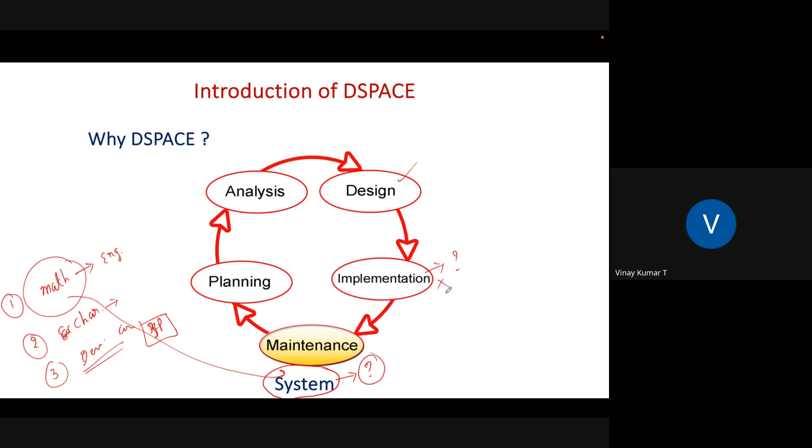The advantage of the DSPACE controller is, once you know the new concept to change the characteristics of the actual system, you no longer need to worry about implementation. Once you adopt the DSPACE controller, implementation is not a big challenge. Within a short period, we can implement the logic and extract the physical characteristics after adopting this controller.

This is the advantage. The DSPACE controller is basically called a rapid control prototyping system. What is the advantage of this rapid prototyping system? Whatever logic you have developed to solve the issues the system is facing, based on the problems faced by the actual system, that logic we can implement quickly, test, and evaluate physically. That is the advantage of rapid control prototyping.

Now, how to access this controller? At the end of today's session you will get clarity. But before that, I need to explain the significance of the controller.

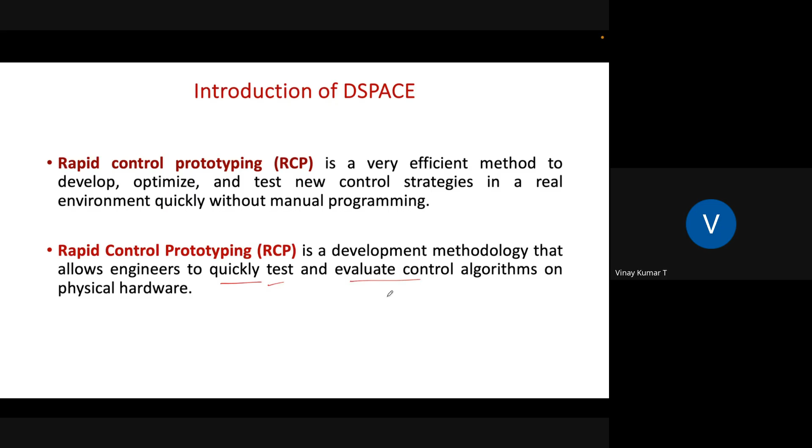The objective of the DSPACE controller is it will execute the control logic. Finally it will give the control pulse to the power semiconductor devices, so that the power semiconductor device controls the energy transfer from the input side to the output side. Whatever output comes from the power converter, it is under control, in order to change the characteristics of the actual system.

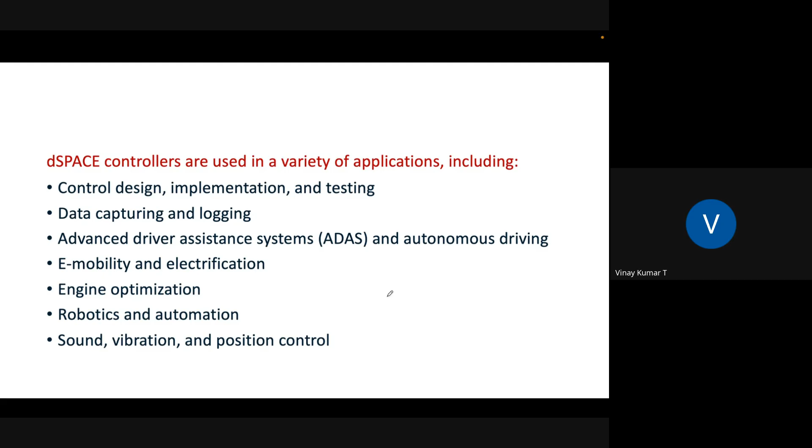These are the various applications of the DSPACE controller: autonomous driving systems, e-mobility, electrification, smart grid applications, grid-connected inverters, robotic applications, position control, vibration, sound, and various other applications. At the end of today's session, I will explain the limitations of this controller and discuss it in detail. For understanding purposes, let's take the EV propulsion system as an example.

In an EV propulsion system, suppose this is the actual EV propulsion system, how can we test your control logic in a laboratory session. These are all the various control methods under the software side, the methods adopted to control the speed of the motor through a power semiconductor device. This mathematical logic, if you want to implement through hardware, in general microprocessor, microcontroller, DSP, FPGA boards are adopted.

The expected output of the electronic controller is finally it will give a control pulse. This pulse will apply to the power converter. The power converter will produce variable voltage and variable frequency to the system. Finally, system characteristics will change based on the customer required speed or customer required position. This is what we are doing in general.

Whenever you want to control the speed of the machine, first you have to change the reference through the software. By changing the reference, your control logic will decide how much duty cycle is required to the power semiconductor device, so that the power semiconductor device, according to requirement, will change the RMS and frequency applied to the system, so that system characteristics will change.

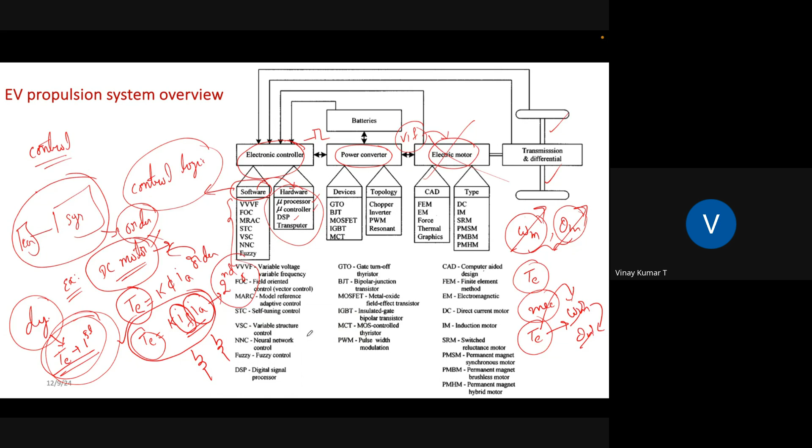By adopting the controller, how the order changes from higher order to lower order, we'll see by taking a simple method that we adopt in undergraduate course. In undergraduate course, there is a popular method, right? What is that method? See, this is a torque profile. Natural response of the DC motor is non-linear, right?

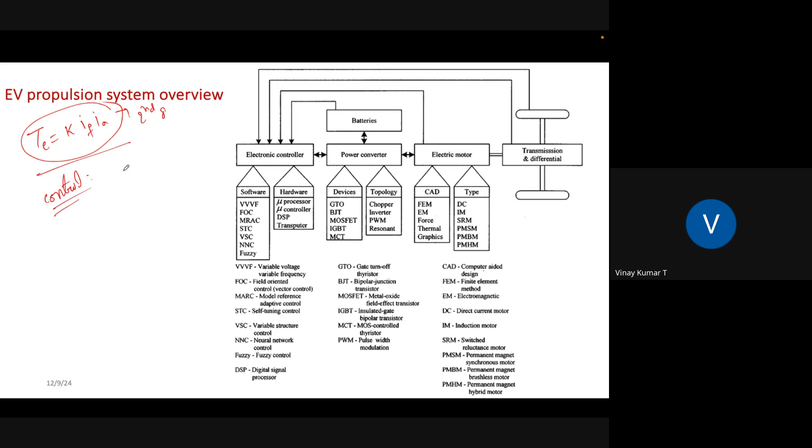So next, what we are doing in the laboratory while controlling the motor below base speed, right? To control the speed below base speed, we are adopting the armature control method. Now, what are we doing in the armature control method? This method is very popular to control the speed of the DC motor. In armature control method, throughout the operation, we are maintaining field current as a constant.

Please understand, this is a technique. This is a control technique. Whether it is open loop or closed loop, you forget it. This is the concept proposed by the engineers to control the torque instantaneously. To bring the system from higher order to lower order, they have proposed this method for DC motor. In armature control method, the necessary condition is that throughout the operation, you need to forcefully maintain field current as a constant.

If field current is constant, then what will happen? Your torque becomes directly proportional to Ia. So this is it. This is the beauty of the control method, the control logic. Once you adopt armature control method to the DC machine, what will happen? Your second order system becomes first order. First order is nothing but linear. If it is linear, we can control instantaneously.

Instantaneous control is so important for industrial applications; wherever high performance is required, instantaneous control is required. If you want to control the speed or position instantaneously, your control variable should be in linear mode, right? It will not simply convert from nonlinear to linear. You need to adopt some engineering technique so that we can change the order of the system from second order to first order. A first order system is required to improve the dynamic response.

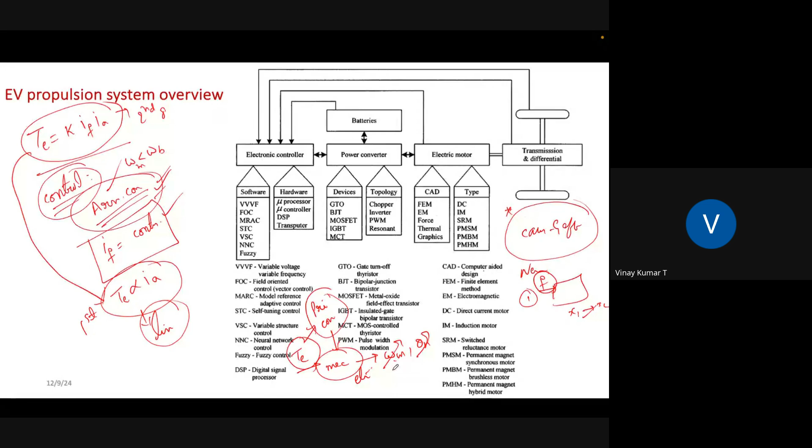So the main objective of today's session is understanding how to implement the control logic in dSPACE. At the end of today's session you will get clarity. Before that, you should know the significance of the controller, its main objective, why it is required. Without a controller, we cannot improve the dynamic response instantaneously. If you want to, you need to adopt a controller. By adopting the controller, we can reduce the order and improve the dynamic response. Next.

One more important concept is, what are the challenges in AC systems? In grid connected systems, particularly in smart grids, you need to adopt three-phase inverters. What are the challenges with respect to the three-phase AC system? Anyone? What are the issues with a three-phase system?

Anyone from the participants? What is the issue with the three-phase AC system? "So the unbalance is existing within the three-phase system." Okay, unbalanced. Let us assume that everything in the system is fine, that there is no unbalance. Then? "Synchronization." Okay, everything is fine.

You see, I'm not talking about whether the AC system is balanced or unbalanced. Now everything is fine. On the input side there is a balanced supply. All signals, A phase, B phase, C phase, are in symmetry. Time delay is there, right? Magnitudes are also fine, peak values are also matching. Now, for understanding purposes, can I explain here by taking one example, right?

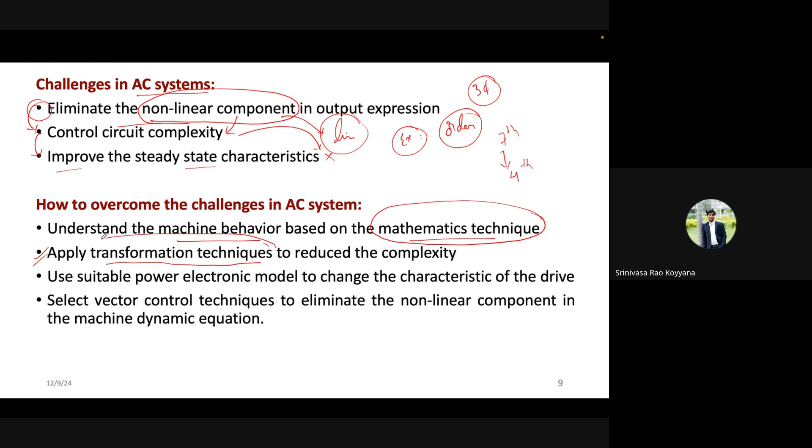What is... We analyze the system behavior, sir. We analyze the system behavior. Okay, we'll analyze the system behavior. Okay, anyone? To determine gain constants. Anyone else? Anyone?

It is a technique. It is an engineering technique. It is a mathematical technique, right? By adopting this technique, this one will help to reduce the complexity. For example, if your system is in 7th order, it will bring it from 7th order to 4th order. Anyway, this is the expected outcome of the transformation technique.

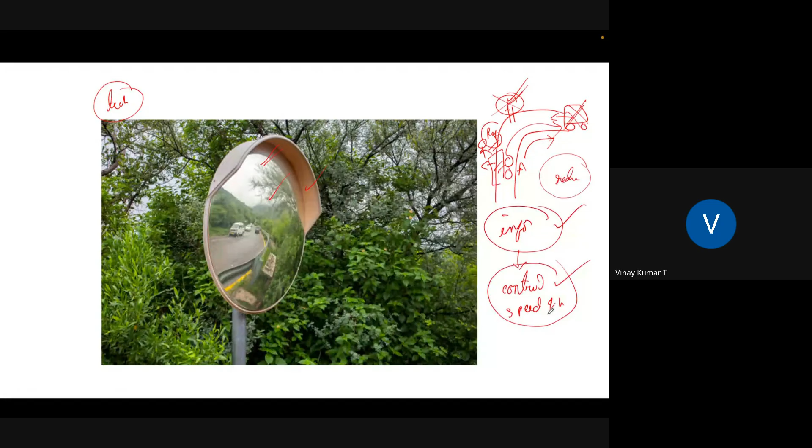So what is the primary objective of this mirror? The mirror will give information. Based on the information, from a reference point of view, from a control point of view, we can easily control. You got my point? What is the need of transformation? Basically, transformation techniques will give information about the actual systems in terms of two-phase variables. That is the primary objective of the transformation.

See, our natural systems are always three-phase, right? Whenever you want to extract the behavior of the three-phase system, we can also extract it by taking three-phase variables. But the problem is, three-phase systems are more complicated than two-phase systems, right? That's why by using two-phase transformations, we can minimize the execution time, and whatever information is available in three-phase, the same information we can extract through two-phase variables. Once you get the information in two-phase variables, it is not a big deal to control the actual system.

Got it, participants? You got my point? What is the need of transformation? Getting information is the primary objective of the transformation. It is a technique. Once you get the information about the actual system in terms of two-phase variables, it is not a big deal to control our system.

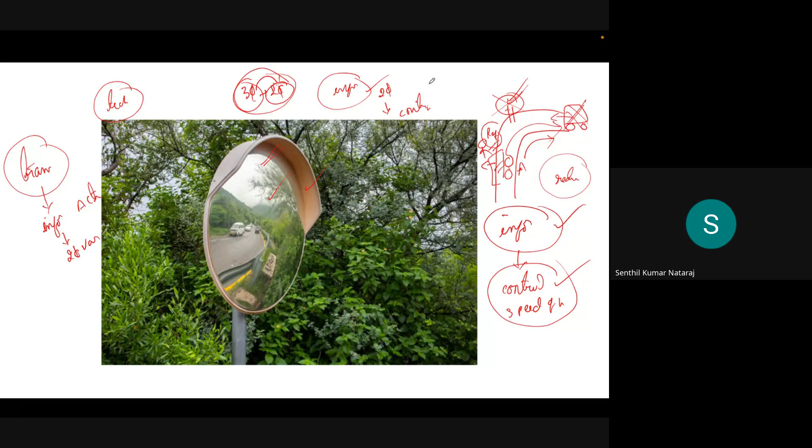Yes, sir. See, many of the scholars think that this transformation will minimize the order, or transformations will reduce the order. Please understand: by using transformation, we cannot bring the system from higher order to linear mode. We can minimize the order, but we cannot bring it into linear mode. If you want to bring it to linear mode, you have to apply advanced control methods.

By adopting the advanced control method, we can bring it, but combinations are required. By adopting this transformation technique and control technique with a power electronic module, by combining these three techniques, we are able to bring the seventh-order system to fourth order by adopting transformation. After that, advanced control methods are required. By adopting these control methods, we can change the order from fourth to first order.

So transformation techniques are required. Next, advanced control methods are required, plus a power electronic module. By taking the combination of transformation technique, control method, and power electronic module, we can eliminate the nonlinear effect in the complicated AC system.

By using the combination of transformations, power electronic module, and advanced control methods, the advantage is we can improve the dynamic response of the AC system similar to a DC machine. That is the strength of this transformation technique and power electronic module. Without the power electronic module, we cannot change the characteristics. Please try to understand. Right?

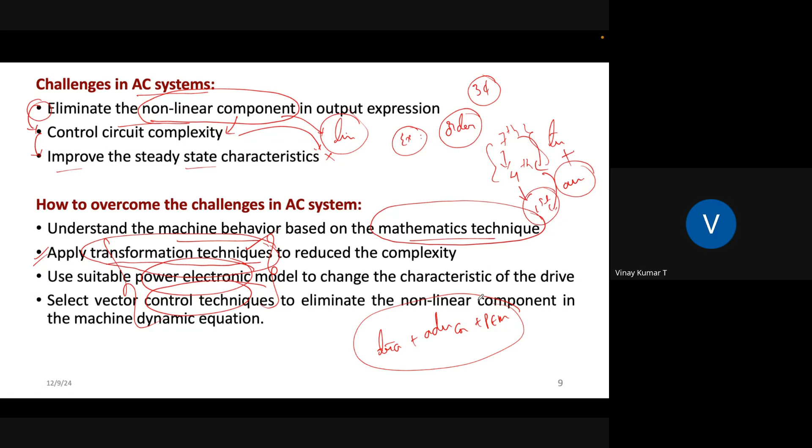See, the main objective of today's session is to control the power converters through dSPACE software. Whenever you want to control the power converter, first you should know why a controller is required, why control logics are required, why transformations are required. Transformations will give information. The primary objective of transformations is to give information about the actual system in two-phase variables. Take this example.

These three techniques are very popular for electrical scholars, particularly in power system and power electronic applications, to control the system. So what is the primary function of the Clarke transformation? Your natural system is always in three phase. By adopting the Clarke transformation, three-phase variables will convert to two phase. Next, by adopting the Park transformation, two-phase AC variables will convert to two-phase DC.

Many of the scholars think that by adopting Clarke transformation or Park transformation, or directly three-phase AC to two-phase DC, the characteristics will change. Please try to understand, characteristics will not change by adopting the transformation. Only by adopting the transformation technique plus advanced control methods will the characteristics of the actual system change.

These transformations basically only give information in terms of two-phase variables. Once you know that information, after adopting the engineering and design techniques, we can improve the dynamic response. Many scholars think the dynamic response will improve by adopting the transformation technique, but it will not improve simply by adopting it. By adopting the transformation technique, we get information with fewer variables.

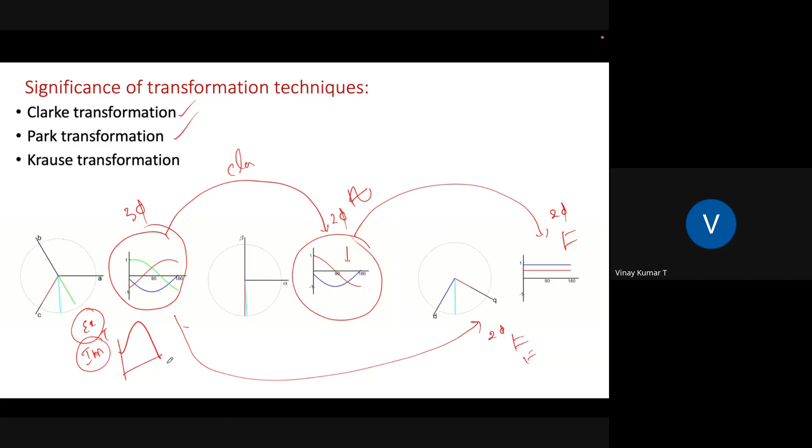For understanding purposes, take the best example, the induction motor. Why? Because it is a very popular machine; 80 to 90% of industries adopt it to meet mechanical requirements. What is the expected output of the three-phase induction motor? Torque. This is the nature of the torque generated by the three-phase induction motor. By taking three-phase variables, we can extract the behavior of the induction motor.

Instead of three-phase variables, by taking two-phase variables also we can extract the same information. Whatever torque is generated by the three-phase system with three-phase variables, the same profile we can extract with two-phase variables. Instead of AC signals, by adopting the Park transformation, the same characteristics, the same torque profile, we can extract with DC variables also.

Here the common point is, whether you take three-phase variables, two-phase AC variables, or two-phase DC variables, the characteristics of the system won't change. The system behavior is the same. Only the number of variables involved in extracting the behavior is different, right? You got my point. One more important thing: what is the common point among the three cases? Anyone?

Forget about the common point. I want to ask one important question. What is the base for this transformation technique? Anyone? What is the base for converting three-phase to two-phase AC variables, and two-phase AC to two-phase DC? What is the base for this transformation technique? Anyone from the participants?

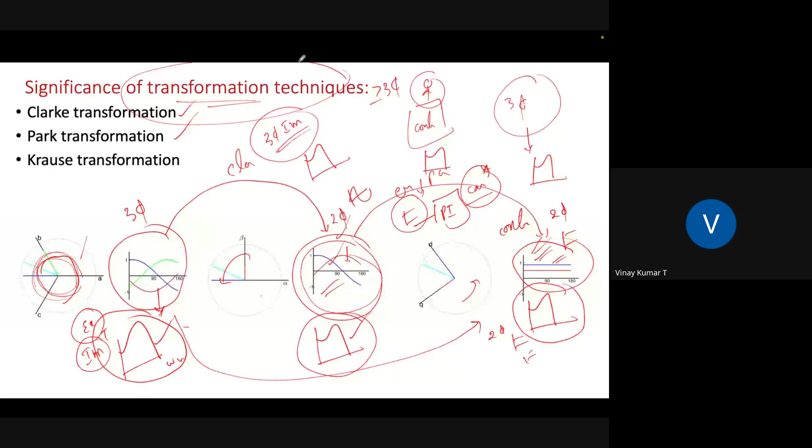Your system is an AC system. The challenge is more number of variables are involved in the output variable. If more variables are involved, you have to adopt a transformation technique, and by using transformation technique, advanced control methods, and different power electronic module combinations of these three, we can improve the dynamic behavior of the system based on the customer requirement. These are all the topics we covered till now.

Next, another important question is, the base for transformation signal is MMF. This is a very beautiful concept. Whenever you want to convert the signals from 3-phase to 2-phase or 2-phase to DC, they take MMF as the base. Whatever MMF is produced by this 3-phase system, you have to take care of the same MMF. MMF should not vary. The resultant net MMF produced by the 3-phase system and the net MMF produced by the 2-phase system must be same. If you satisfy this condition, it is not a big problem to meet the power invariant or magnitude invariant condition while transferring signals from 3-phase to 2-phase.

Power invariant condition is so important for grid connected inverter applications. Whenever you want to control, particularly in smart grid applications, real power or reactive power, this power invariant transformation technique is so important. Even in drives applications, the magnitude invariant condition is so important.

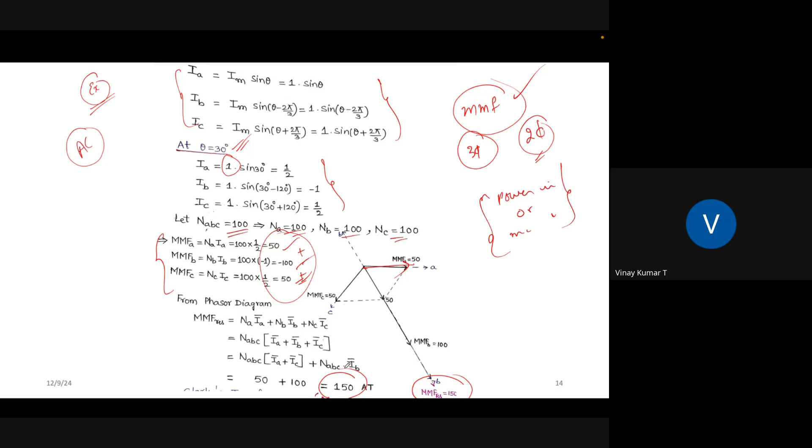Now let us apply Clarke transformation. The significance of Clarke transformation while converting variables, 3-phase to 2-phase, right? By taking this coefficient, we can maintain magnitude invariant. Magnitude invariant condition is so important for drives application.

Whenever you want to control the torque generated by AC machines, generally they are adopting this magnitude invariant condition. In magnitude invariant condition, this factor is so important. Even if you take magnitude invariant condition and substitute here, take same instant, finally net MMF produced by the 2-phase system is also 150 ampere turn. Even if you take magnitude variant,

nothing but power invariant condition. Even if you adopt power invariant condition, net MMF won't change. This power invariant condition is so important in case of grid connected inverters. Whenever you want to control real or reactive power effectively, they are using this coefficient. Coefficient of the transformation matrix is square root of 2/3.

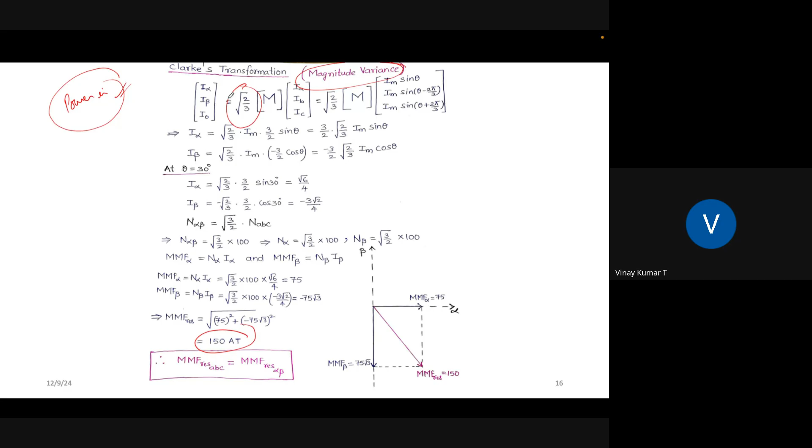This coefficient generally they will calculate based on the MMF. MMF is so important while converting signals from 3-phase to 2-phase. MMF should not vary. Whatever MMF produced by the 3-phase system, if you maintain the same MMF, it is not a big deal to convert the information from 3-phase to 2-phase with fewer variables.

Anyone from the participants? Participants? Yes sir. You know about feed forward controller? Anyone from the participants? What is the significance of feed forward controller? Where is it required? At least you heard the name of this feed forward controller? Participants? What is the object of this feed forward controller?

See, whether it is a feed forward controller or feedback controller, any controller, the main object is to improve the system response. It will reduce the order of the system and eliminate the effect of the dominant pole. Whether practically, first you need to understand the characteristics of the actual system. Based on the characteristic equation of the actual system, you need to identify if there is any dominant pole. If a pole is close to origin, the system response will become very poor. By using this feed forward controller, this is one engineering technique to eliminate the effect of the dominant pole.

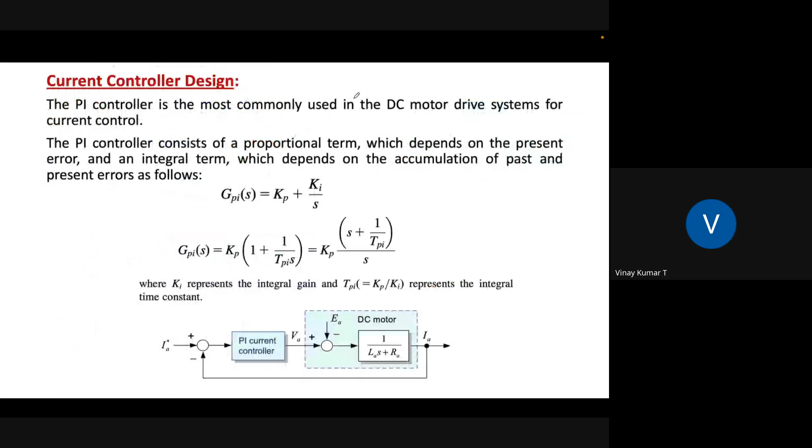It is entering the system because of back EMF. Back EMF is directly proportional to omega m. Omega m is the output of the mechanical circuit. Mechanical system transfer function model is 1 by Js plus B.

So finally, because of back EMF, what will happen? Mechanical time constant is involved in the electrical circuit. Basically, your armature circuit is electrical circuit. But once back EMF enters the picture, while controlling the current, there is a mechanical time constant entering in the picture.

So the nature of the mechanical time constant tau m, there are two poles, one by tau m, one by tau a. Tau a practically is very less. If tau a is very less, pole position P1 is very far from the origin. So tau m is very, very high. If tau m is very high, P2, the pole offered by the armature circuit due to back EMF, has a very high time constant, so that pole position is closely to 0. P2 is closely to 0.

So what is the problem? Once back EMF enters the picture, bandwidth of the circuit is decreasing. Bandwidth is nothing but distance between the origin to dominant pole. If bandwidth is less, ability to track its reference is very poor.

So as an electrical scholar, as a designer in any system, first you need to extract the characteristic equation of the system. In the characteristic equation, you need to identify if any signal is creating disturbance or not. If the disturbance signal is really creating harm in the response, we don't have any option, you need to adopt a technique.

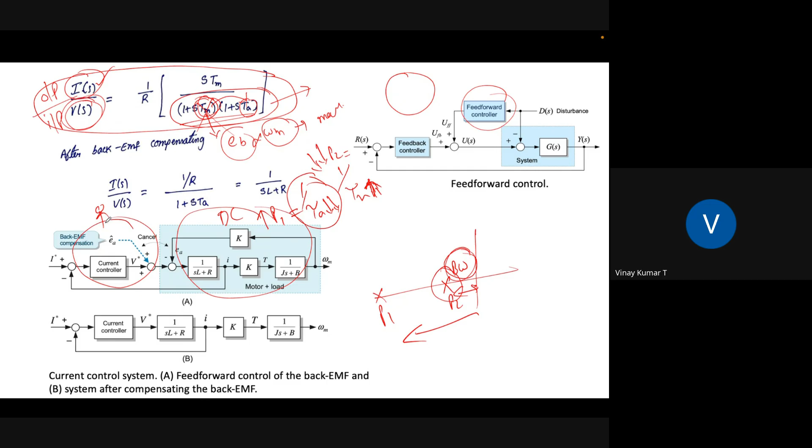By adopting the feed forward controller, here's what they will do. This is our controller, this is our system, this is our DC machine. With respect to controller, this signal is acting as a disturbance. To eliminate the effect of disturbance, from a control point of view, you should know what is the polarity of the disturbance.

If polarity of the disturbance is negative, you need to inject the positive back EMF with respect to controller. If you add positive back EMF signal with respect to controller, then with respect to this reference point, back EMF minus and back EMF plus will cancel each other. Here, the effect of the dominant pole will be eliminated with respect to this reference point.

This is the transfer function model after adopting this feed forward controller. This is the significance of feed forward controller. By using feed forward controller, we can eliminate the effect of the dominant pole. By adopting a feed forward controller, we can improve the bandwidth.

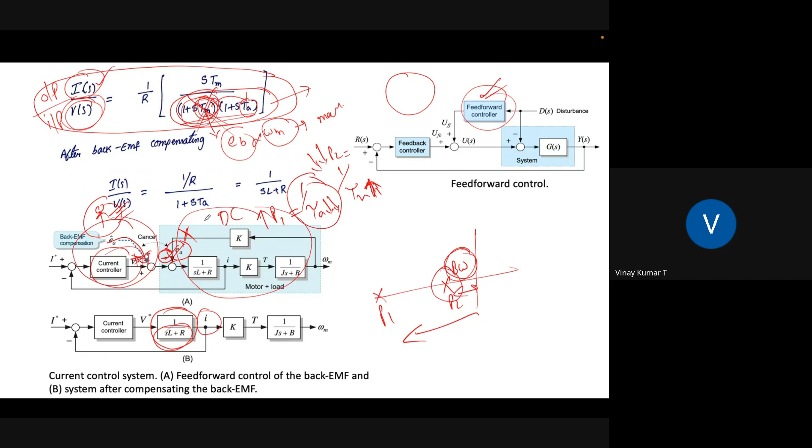Once the bandwidth of the system is improved, automatically the dynamics of the IA will increase. IA dynamic response only depends on the electrical pole. Earlier it was mainly dependent on the mechanical pole. Mechanical pole position is very close to origin, in that case it's very difficult.

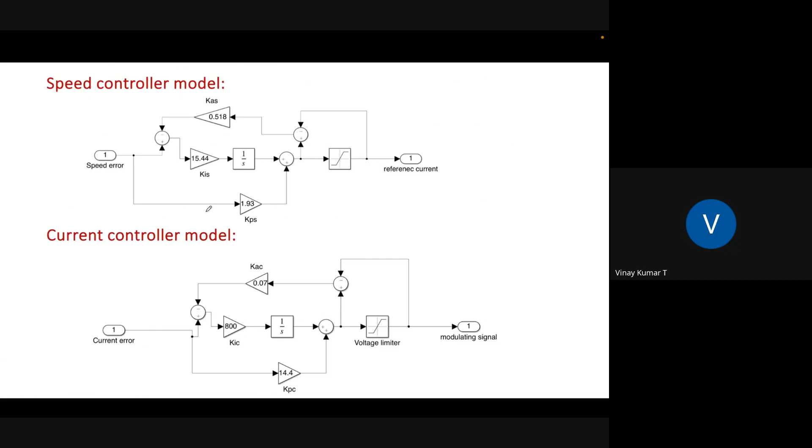If you want to improve the dynamic response, you have to bring the pole far from the origin. If you want to bring the pole position far from the origin, you need to identify whether any dominant poles are there in the system or not. How can we identify the dominant pole? Based on the characteristic equation.

My suggestion is, whenever you want to control the system, whether it is a simulation or hardware, the important thing is you need to analyze the system characteristics in detail. After analyzing the system characteristics, you have to identify whether any disturbances are there in the system or not. If there are any disturbances, you need to identify whether the disturbance is really creating harm or not.

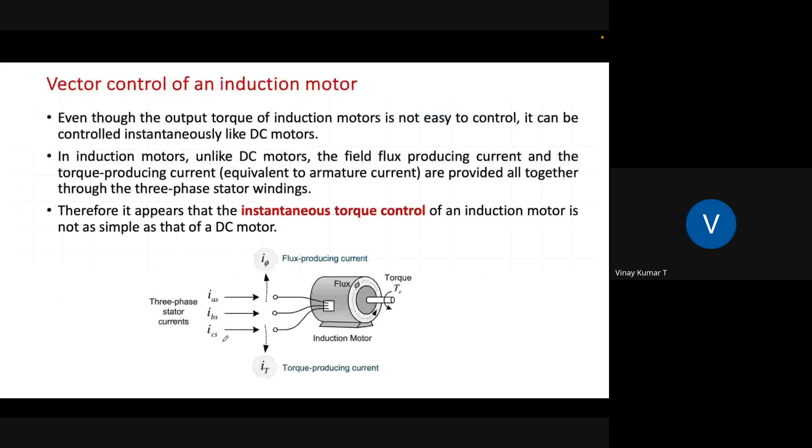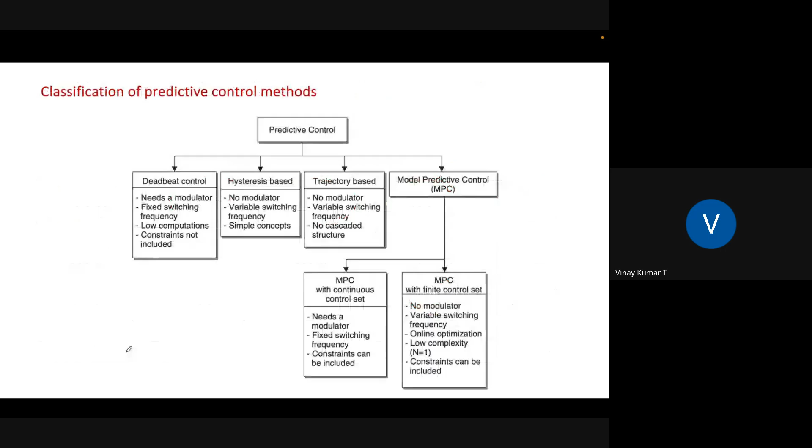Now, by using this slide, without spending more time, I can tell what is the advantage of the model predictive controller compared to conventional PI controllers. Most engineers, for their research work, are adopting the PI controller. If you adopt a model predictive controller, your steady state response will improve.

But whenever you want to implement a model predictive controller, it requires two things. Your controller must be a digital controller. Plus you should know the actual system model. Without knowing the actual system model and without adopting a discrete controller, we cannot implement model predictive control. This model predictive controller is applicable only for digital. Using analog controllers, we cannot implement it. By using DSP or FPGA boards, we can implement this controller effectively.

So what is the basic difference between the PI controller and the model predictive controller? By using this slide, we can understand. Anyone from the participants, if you know the difference between these two, you can tell. Participants, you know about model predictive control? It can estimate the future value. Okay, anyone? Anyone from the participants?

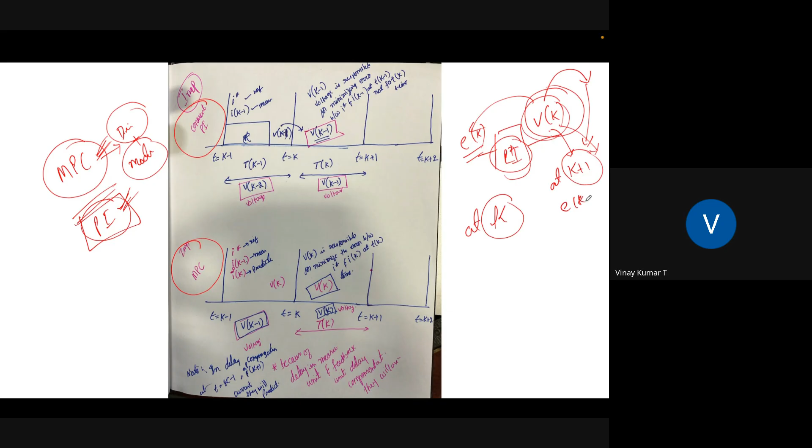But if you take model predictive controller, based on the error, it will predict the error k plus 1 at kth instant itself. It will identify the behavior of the error at k plus 1 instant and the required voltage for k plus 1 instant. It will calculate at kth instant itself. Finally, whatever voltage vector is decided at kth instant, that voltage v of k plus 1 will apply at k plus 1 instant only. So this voltage vector will take responsibility to eliminate the error effectively at k plus 1 instant. This is the basic difference between model predictive controller and PI controller.

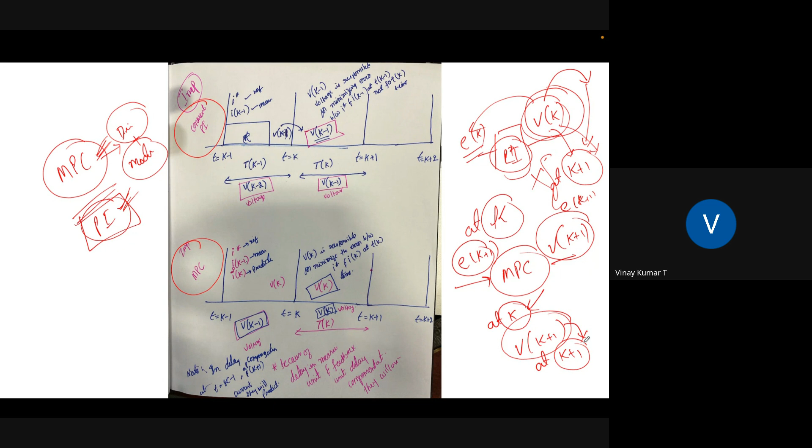In the PI controller, there is a sample difference in voltage vector. Whatever voltage vector you are applying at a particular sample, that voltage vector is not responsible for eliminating the current error. It is responsible for eliminating the error in the previous sample. That's why, if you verify the response, see, this is the PI controller or hysteresis controller. This is the response after adopting the model predictive controller. If you verify this response, steady state response is improved with the model predictive control technique.

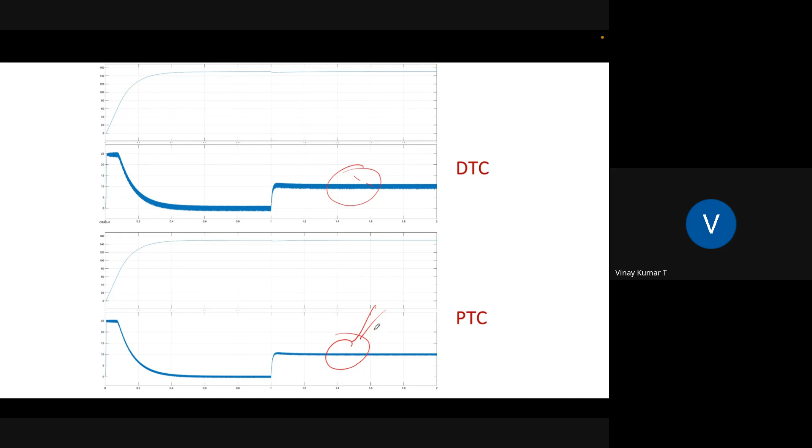The advantage is, we are predicting the state one sample ahead. What voltage vector we need to apply in the coming sample, we are predicting, and we are applying the voltage vector more accurately so that we can eliminate the error effectively. This is the advantage of the model predictive control method.

Now come to implementation. How to implement the dSPACE. Till now we have discussed the significance of the controller and what dSPACE is. While implementing dSPACE, please try to understand, it is a module. It is a combination of software and hardware modules. By taking the combination of software and hardware modules, we can easily execute the logic without coding. It doesn't require any coding. Simply, if you know the mathematical model of the actual system, we can easily implement the mathematical model in MATLAB software. Through MATLAB software, we can execute the logic and transfer the data to the controller.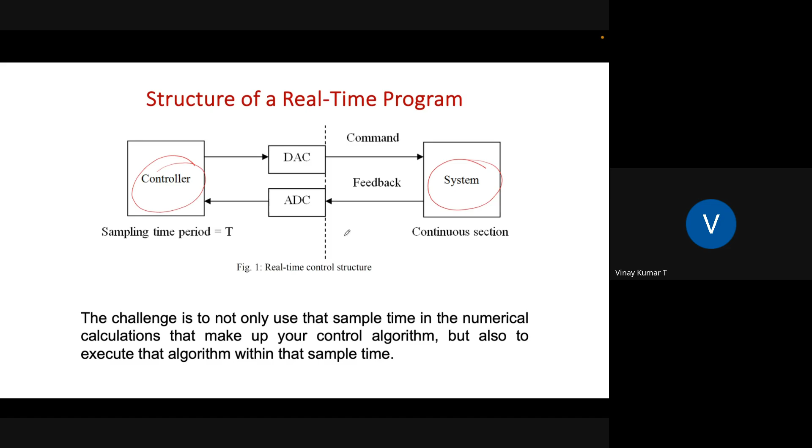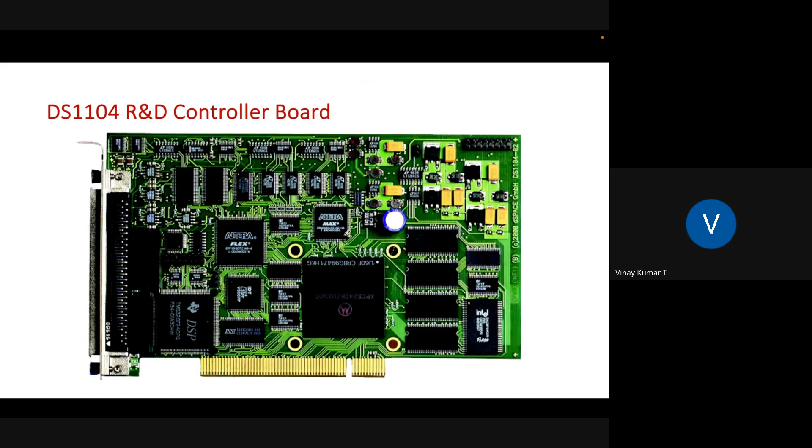Next, one more important thing is synchronizing the system and controller. This is very important. Your system is always continuous, but your controller is always in sample time. Now this is about the control board of the dSPACE 1104 module. This is the architecture of the dSPACE 1104.

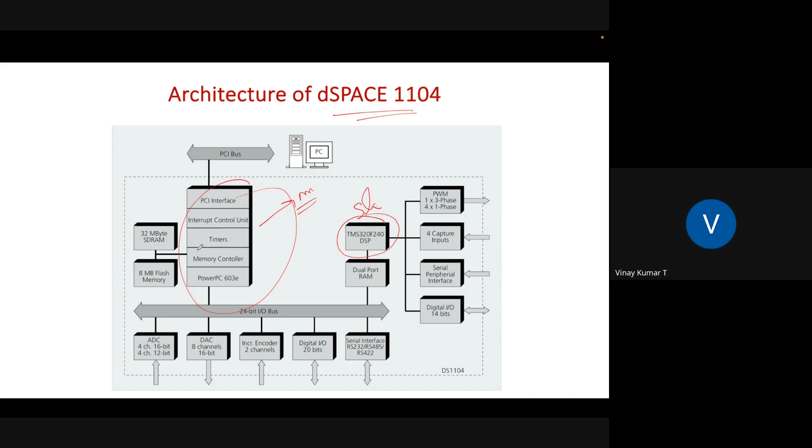If you take the dSPACE controller, there are two controllers. One is a microcontroller, another one is a DSP processor. This DSP processor is acting as a slave. This processor is acting as a master. In most cases, by using the master controller itself, we can execute the logic. Whenever you want to adopt the slave also, it is fine, no issue. But in most cases, engineers and scholars adopt the master controller itself to execute the logic.

Finally, the controller output is pulses. If you take any control logic and execute it through the dSPACE software and hardware combination, finally we can extract the pulses. These pulses we have to apply to the power electronic module. The expected output of the digital IO output pins is control pulses. If you want to activate the slave also, you can. By using the slave DSP processor, we can extract the control pulses here. In most cases, by using the master controller itself, we can extract the pulses.

Next, here DACs are available, digital to analog converters. Next, analog to digital converters are required. By using an analog to digital converter, we can send an analog signal to the controller in the digital platform.

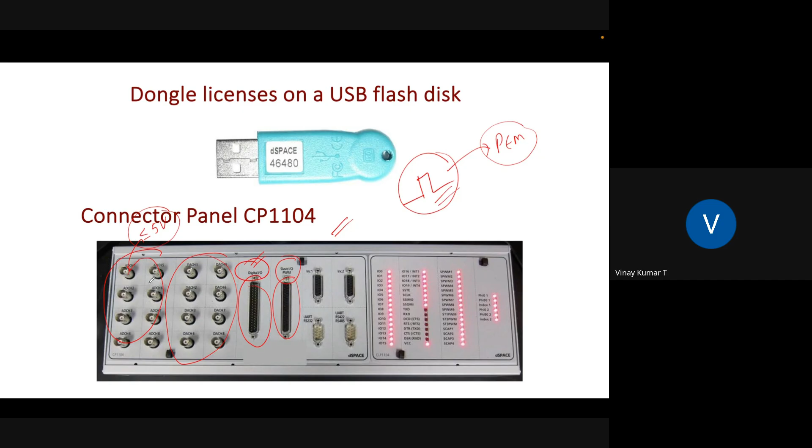Next, one more important thing is, while transferring the signals from an analog system to a digital signal, you need to take care about the voltage ratings. The voltage rating of the ADCs should not go beyond 5 volts. Whatever signal you are applying to the ADC, that voltage magnitude, the effective value, should not go beyond 5 volts, right? That is the rating of the ADC. That's why we should not go beyond 5 volts. You have to take care.

So here, by taking this simple example, I will try to explain how we are protecting the ADCs from higher voltages. At the same time, after scaling down the signal, from a control point of view, you again need to amplify the magnitude so that you will get the actual speed of the system in the digital platform. So this is about scaling of the sensor.

Let us assume a motor is there. My aim is sensing the speed through a tachometer and sending the signal to the dSPACE controller through the ADC. If you want to transfer the analog signal to the digital platform, the scaling factor is so important. What is the function of a tacho generator? Anyone? Participants? Convert speed to the voltage signal. Very good. So input to the tachometer is speed, and output is voltage.

Let us assume the tacho generator in the laboratory has this rating: it will produce 50 volts whenever the motor is rotating at 1000 RPM. This is the specification of the tachometer. This is input, this is output. Based on the input and output rating, we can decide the gain of the tachometer. What is the gain here? Input is 1000 RPM, output is 50 volts. The scaling I will explain later.

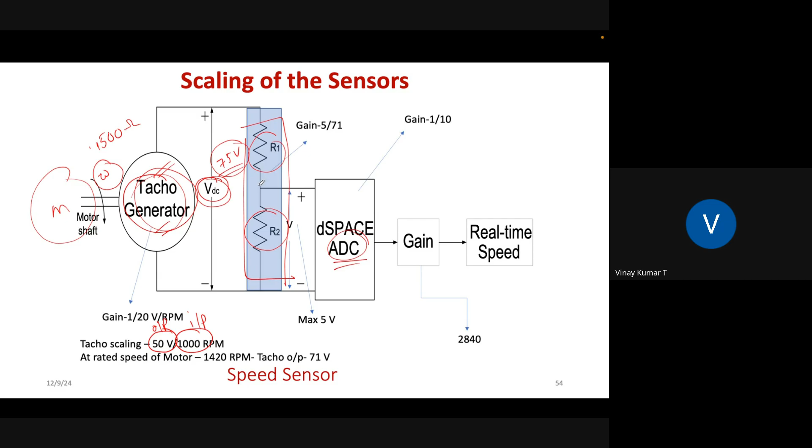Now let us assume the maximum rating of the motor is 1500 RPM. What is the maximum voltage here? At 1500 RPM, it will go to 75 volts. You should not apply 75 volts to the ADC. You have to step down. By using a potentiometer, we can convert 75 volts to 5 volts. Here also there is scaling. The tachometer has its own gain, and the potentiometer also has its own gain. Input is 75, output is 5 volts.

By applying this 5 volts to the ADC, the analog signal will be converted to a digital signal, and we also protect the ADC from higher voltages. Finally, whatever signal is coming here is in the digital platform. This signal you have to convert in terms of the actual motor speed. Here you are getting the information as a digital voltage. How can we convert the digital voltage into speed information? That is based on scaling.

This is very important in the dSPACE controller, not only dSPACE, any controller. If you want to convert an analog signal to digital, first you need to take care about the analog signal magnitude. If it is beyond 5 volts, by using a potentiometer we can step down and protect the ADC from higher voltages. But after converting the signal through the ADC, you have to convert that information in terms of speed.

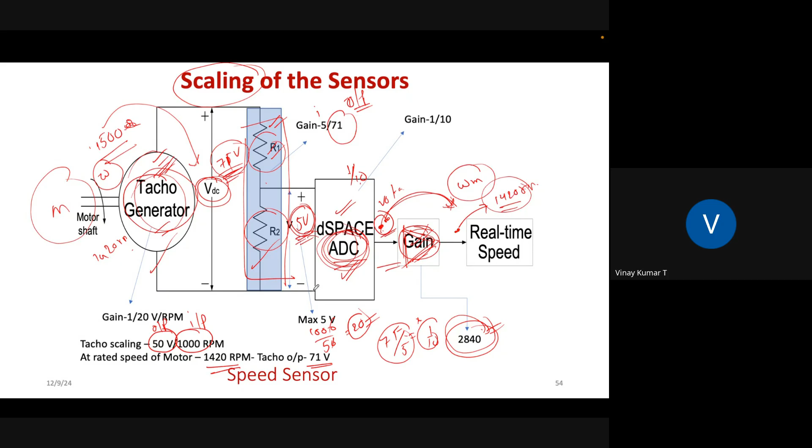Only thing is, you need to multiply each of the stages. This is stage 1, this is stage 2, this is stage 3. There are 3 stages to get the actual information in digital platform. This is how we are doing in the laboratories, scaling to find the gain value, sensing to sense the speed, right? One more important thing is real-time control timing.

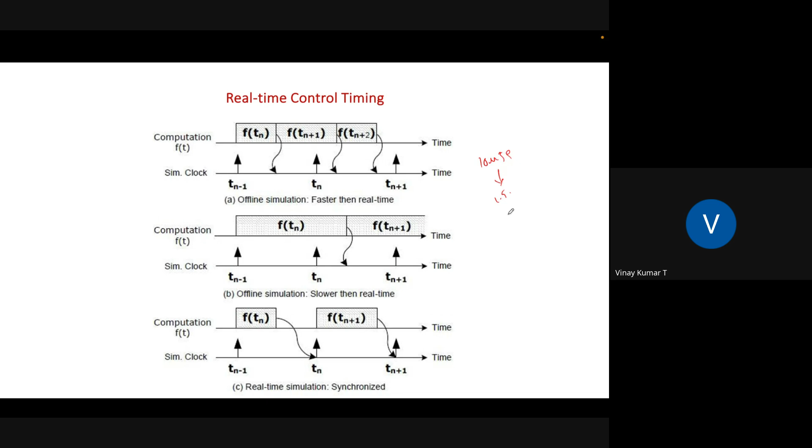See, whenever you want to execute the program, you need to define the sample period. How they will define it is based on the execution time. If execution time is 10 microseconds, sample time you have to take at least 1.5 times the execution time. Then only after completion of each sample, you can expect the output, or you can expect the control pulse to regulate the characteristics of the actual system, right?

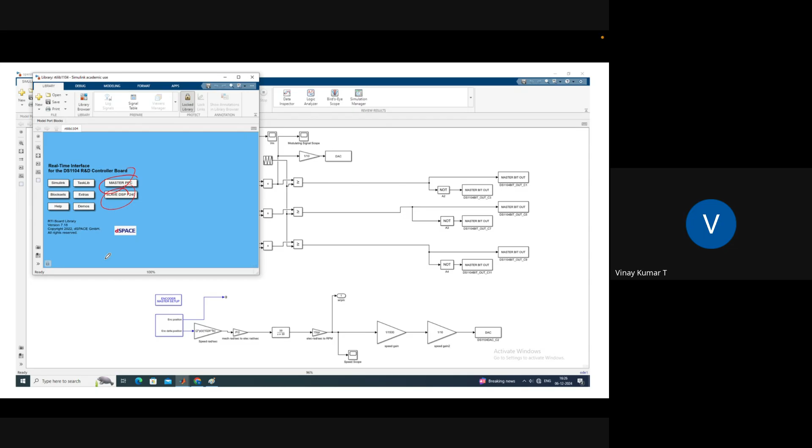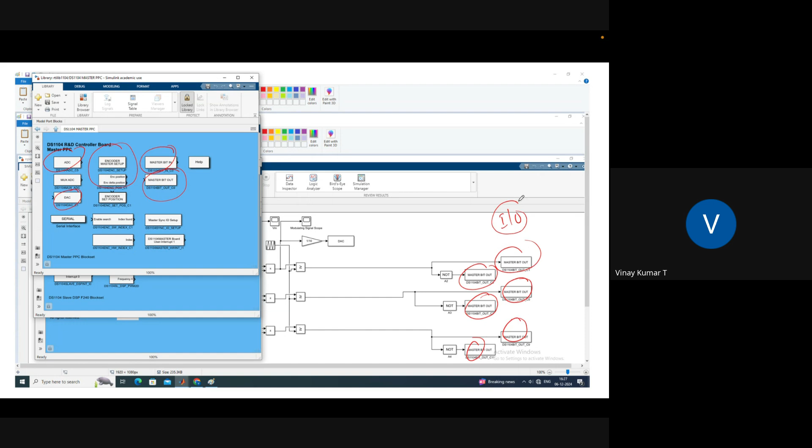Master and slave blocks are available. Inbuilt blocks are there. If you go through the slave controller, PWM pins are available. If you go through the master, ADCs are available. We can access ADCs, DACs, and encoder setup is also available. IO pins, master input and master output pins are available. Master output pins are so important to transfer the pulse from the controller to the IO panel. We have seen the IO board, right? By using these master pins, we can extract the signals through the IO panel.

Now here, this is a simple example, called the simple sine triangle method. By using the simple sine triangle method, we can generate the control pulse. This is our required speed. To meet this required speed, how much voltage and how much angle is required, we can calculate through this logic. This is called V by F method. Finally, using voltage magnitude and angle, we can calculate the magnitude of the A phase, B phase, C phase. These three signals we compare with a high frequency carrier waveform. Finally, you will get pulses.

These A phase, B phase, C phase pulses we need to transfer to the IO panel. If you want to access the IO panel, you have to take the corresponding block. By taking this IO output block, or master output bit block, we can access these pulses through hardware. These pulses we can easily apply to the power electronic model. Please try to understand, this is called real-time Simulink block through dSPACE software. This RTI block is available.

If you take offline MATLAB, you won't get this icon, right? But once you install the dSPACE software and integrate MATLAB to the dSPACE software and hardware, then you will get this block. This is called implementation of V by F method through dSPACE software. Only by doing practice can we understand the concept. It is not a big deal. Next, one more important thing is the control desk. Your MATLAB is acting only as a front end.

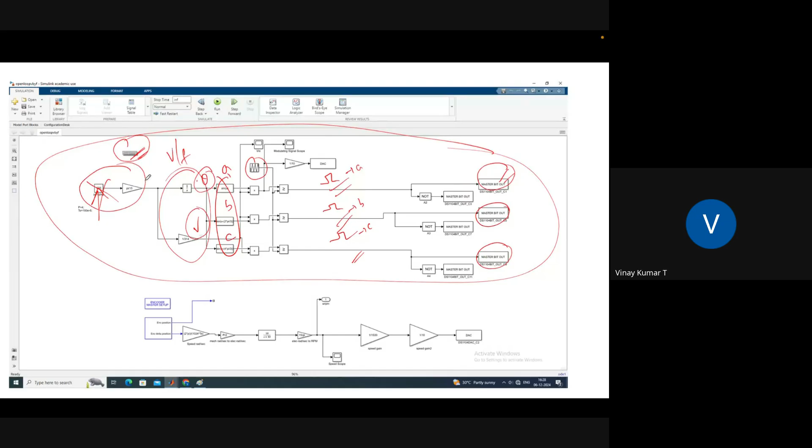Once logic is transferred to the controller, later we cannot change this value through MATLAB. Even if you change this value here, it won't change in the controller. If you want to change the reference value under running condition dynamically, you have to access this.

The significance of the control desk. This is about pin numbers of the IO pins, right? So master output, right? You have to assign the pin number accordingly. See, 1 to 37 pins are available. Out of these 37 pins, some pins are assigned as ground, some as input, some as output or input port. The same pin you can use for input.

If you want to transfer digital data to the controller, or if you want to extract information from the controller, these pins you can use as bidirectional. It is not a problem. The only thing is, you need to take care about the magnitude of the signal. The expected output magnitude of the controller is maximum 3.3 volts.

If you want to activate the semiconductor switch, again it requires an amplifier. By using an amplifier, we can activate the switch based on our requirement, right? See, my request is, executing the logic through dSPACE is not a big problem. The only issue is, first you need to identify the significance of the controller and how to extract the characteristic equation.

Based on the characteristic equation, you need to identify whether there is any problem in the actual system, whether any dominant pole is there or not, any disturbance is there or not. If there is any disturbance, whether feed forward control is really required or not, you need to analyze based on the characteristic equation. If there is a serious issue with a dominant pole, you need to take care about the dominant pole effect in the system, right?